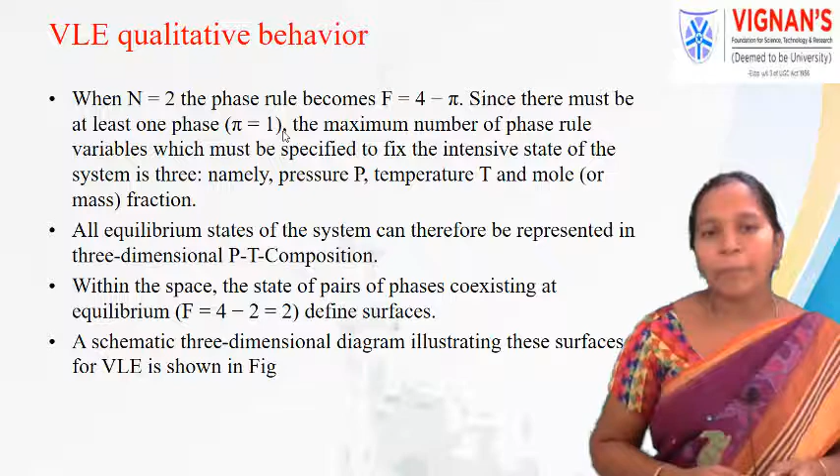A three-dimensional diagram is shown here for VLE, that is pressure, temperature and composition. A three-dimensional figure representing VLE, that is pressure, composition and temperature, is shown here.

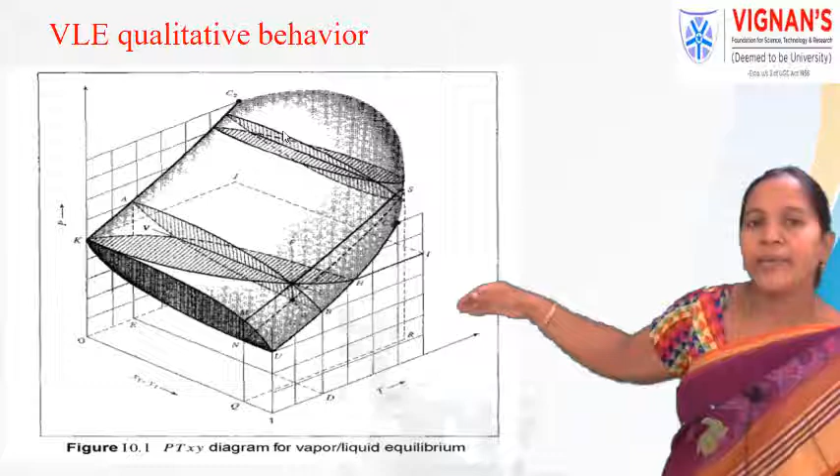Now coming to the description of general vapor-liquid equilibrium behavior. The figure represents the pressure, temperature and composition surfaces which contain equilibrium states of saturated vapor and saturated liquid for a binary system. The lower surface contains saturated vapor, that is the pressure, temperature and Y1 surface.

The upper surface indicates saturated liquid, represented with pressure, temperature and X1. Here X1 is the liquid phase mole fraction, Y1 is the vapor phase mole fraction. These surfaces intersect along the lines UBHC1 and KAC2, which represent the vapor pressure versus temperature curves for the pure species 1 and 2.

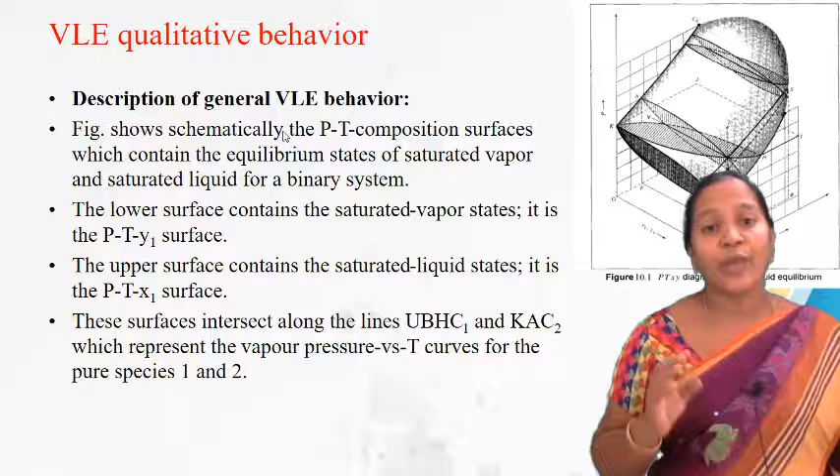Here we have to consider a binary system, that's why we have species 1 and 2. However, the lower and upper surfaces form continuous rounded surfaces across the top of the diagram between C1 and C2. C1 and C2 are the critical points of pure species 1 and 2.

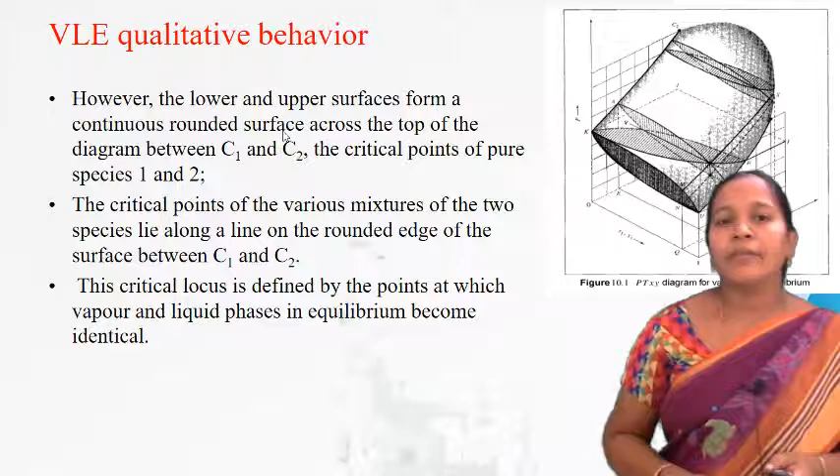The critical points of various mixtures of the two species lie along the rounded edge of the surface between C1 and C2. This critical locus is defined by points at which the vapor and liquid phases coexisting in equilibrium become identical between the critical points.

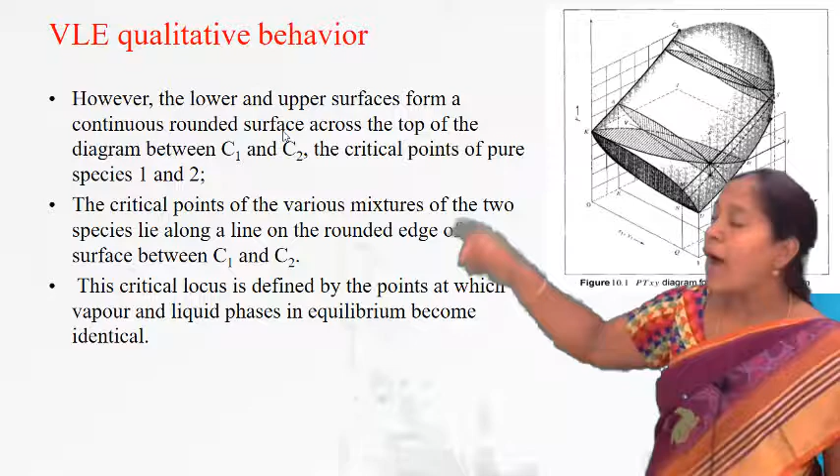The subcooled liquid region lies above the upper surface, as shown in the figure, while the superheated vapor region lies below the lower surface. The interior space between the two surfaces is the region of coexisting liquid and vapor phases.

If one starts with point F, shown here, and reduces the pressure at constant temperature and composition along the vertical line FG, the first bubble of vapor appears at point L, which lies on the upper surface. Point L is the bubble point.

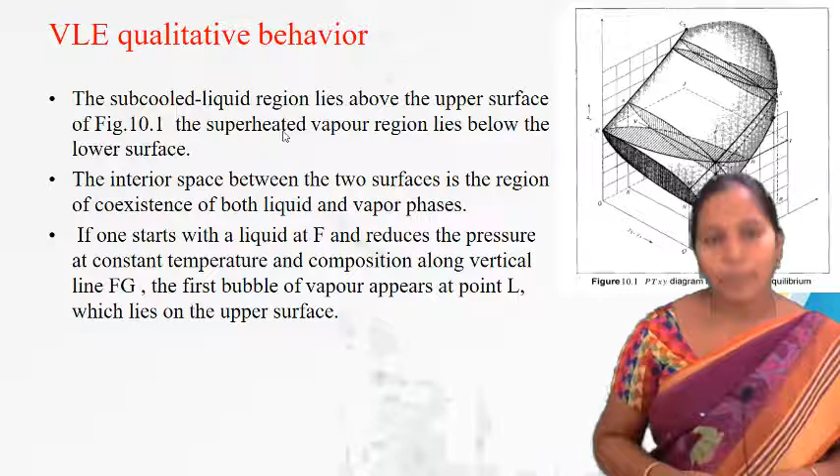The bubble point is defined as the point where the first bubble forms from the liquid. Thus the upper surface is the bubble point surface; L is called the bubble point, and the surface containing it is called the bubble point surface.

The state of the vapor bubble in equilibrium with the liquid at L must be represented by a point on the lower surface at the temperature and pressure of L. This point is indicated by V. Line VL is the tie line, which connects the points representing phases in equilibrium.

A tie line is the line connecting the two phases in equilibrium; here line VL is the tie line.

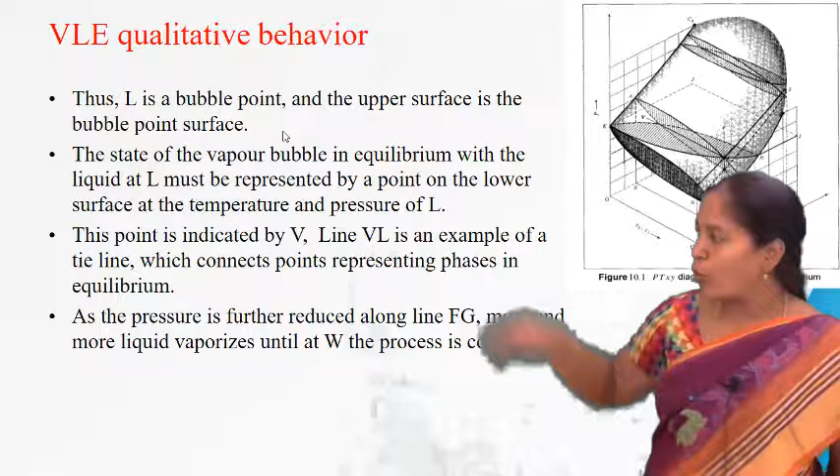As the pressure is further reduced along FG, more and more liquid vaporizes until point W, where the process is complete. Thus W lies on the lower surface and represents a state of saturated vapor having the mixture composition. Since W is the point where this occurs, it is called the dew point.

The dew point is defined as the point at which the last drop of liquid disappears. Since W is the point at which the last drop of liquid disappears, it is the dew point, and the lower surface is the dew point surface.

Further continuous reduction in pressure leads to superheated vapor.

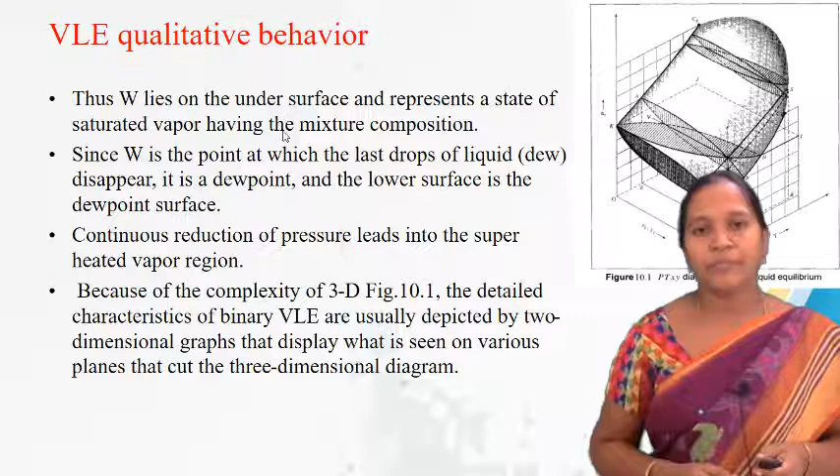Because of the complexity of 3D diagrams, the detailed characteristics of binary vapor-liquid equilibria are depicted in two-dimensional graphs, which are cut into two parts of the three-dimensional diagram. That is Pxy and Txy.

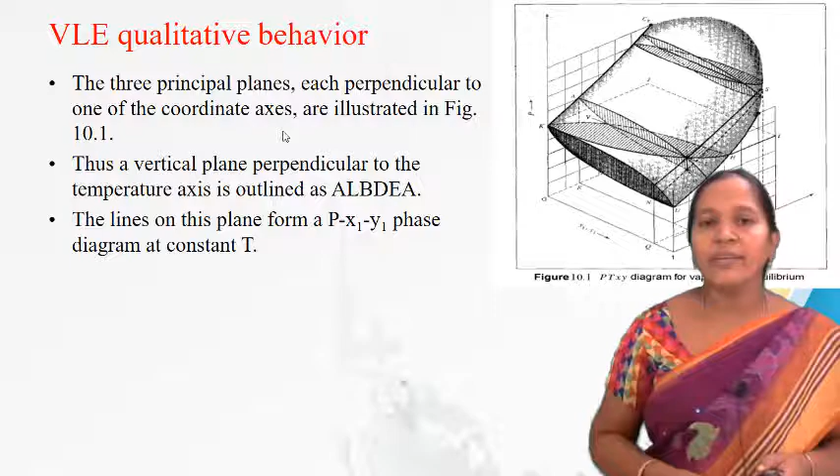If the lines from several such planes are projected onto a single parallel plane, a diagram is shown in A, which is the Px1,y1 plane at three different temperatures. The temperature TA represents, in the first three-dimensional figure, the indicated area ALBDEA.

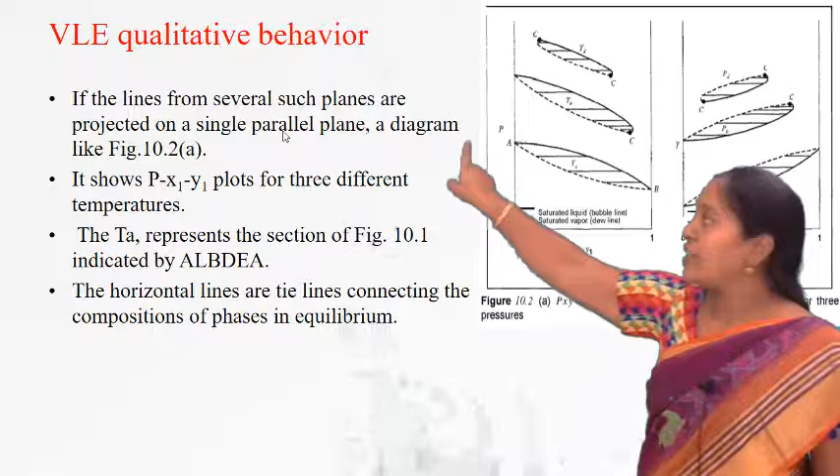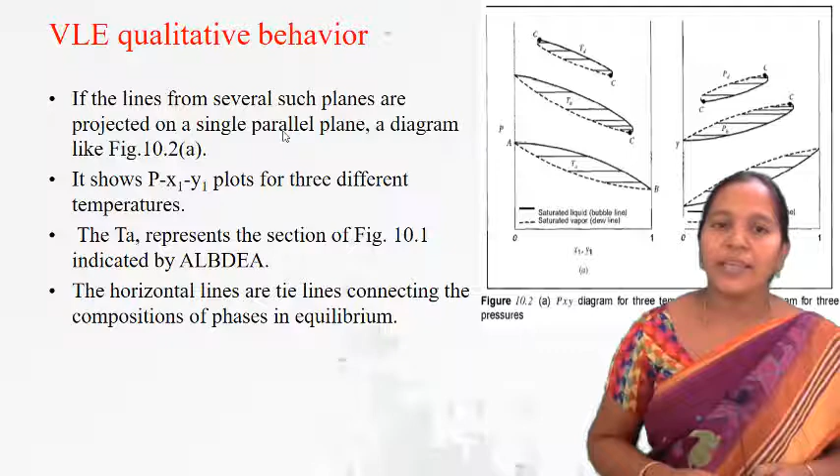The horizontal lines are tie lines, shown in figure A, connecting the compositions of phases in equilibrium. The temperature Tb lies between the two species' critical temperatures, identified by C1 and C2.

The temperature Tb lies between the critical temperatures C1 and C2, shown in the three-dimensional diagram, and the temperature Td is above both critical temperatures, that is above C1 and C2. The curves for these two temperatures therefore do not extend all the way across the diagram.

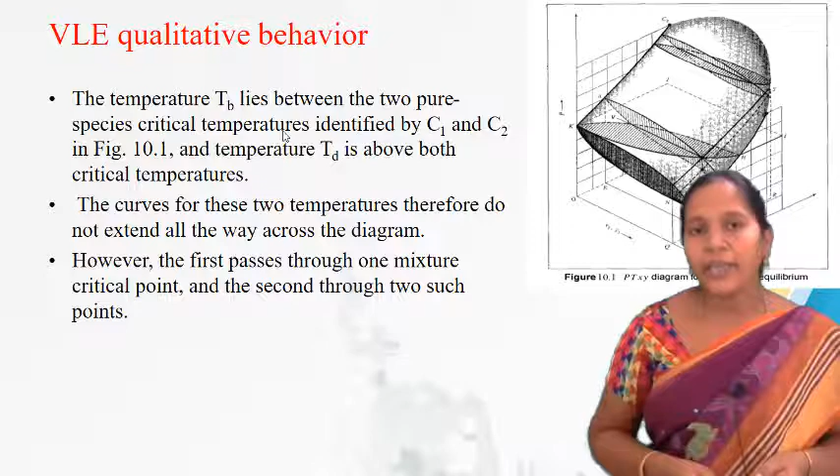However, the first passes through one mixture critical point and the second through two such points. The temperature Tb indicates the area between the critical temperatures C1 and C2. Td is above the critical temperature in the 3D diagram. All three of the critical points are denoted by the letter C.

Each critical point is the tangent at which the horizontal line touches the curve. This is so because all tie lines connecting the phases in equilibrium are horizontal tie lines. The tie line connecting identical phases must therefore be the last line to cut the diagram.

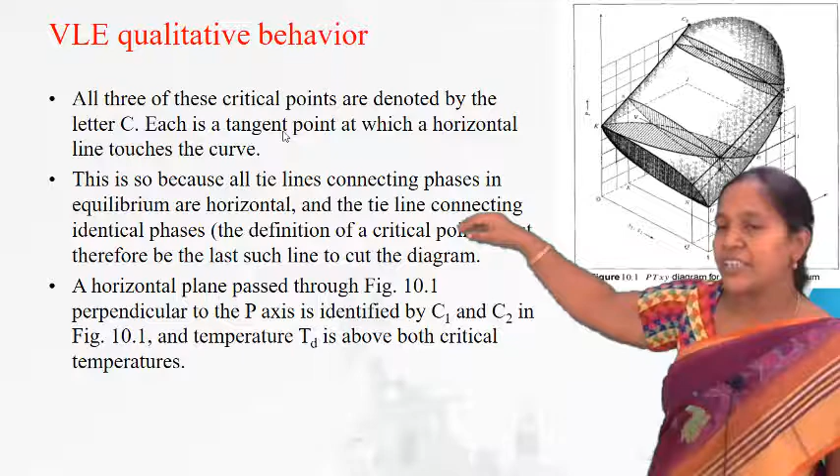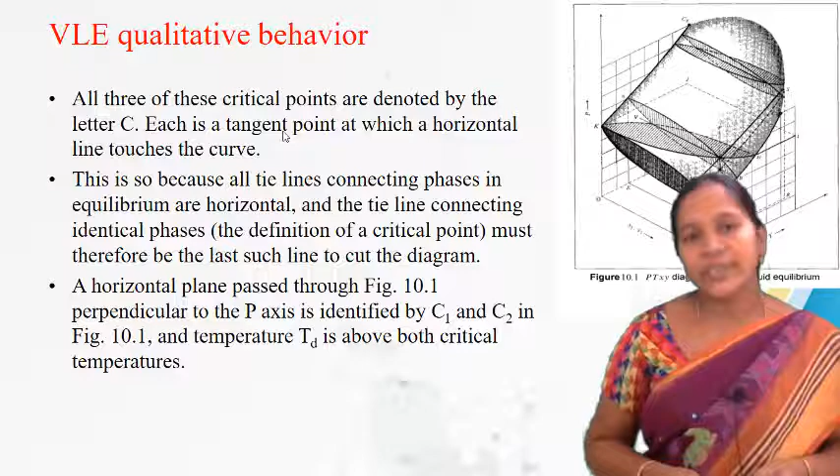A horizontal plane passes through the three-dimensional diagram perpendicular to the p-axis, identified by critical temperatures C1 and C2 in the 3D diagram. The temperature TD is above the critical temperatures, that is above C1 and C2. The horizontal plane passed through the three-dimensional diagram perpendicular to the p-axis is identified by the area HIJKLH.

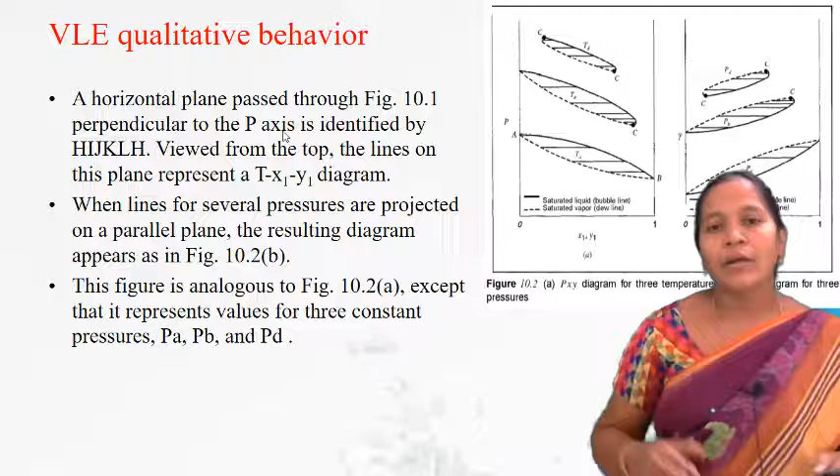Viewed from the top, that is the Tx1,y1 diagram, shown in figure B. When lines for several pressures are projected on parallel planes, at three different pressures PA, PB, PD, the resulting diagram is drawn in figure B. This figure is analogous to figure A, except the values of temperature are replaced with pressures.

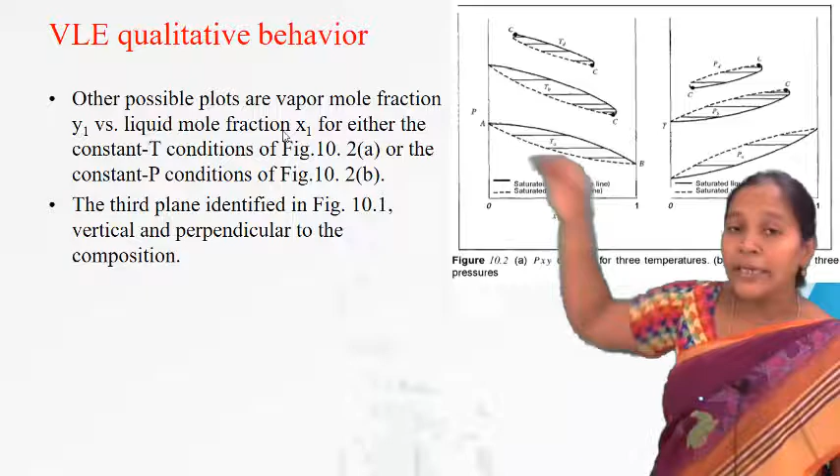Other possible plots are mole fraction Y1 versus liquid mole fraction X1, either at constant temperature or constant pressure. The third plane identified in the 3D figure is vertical and perpendicular to the composition.

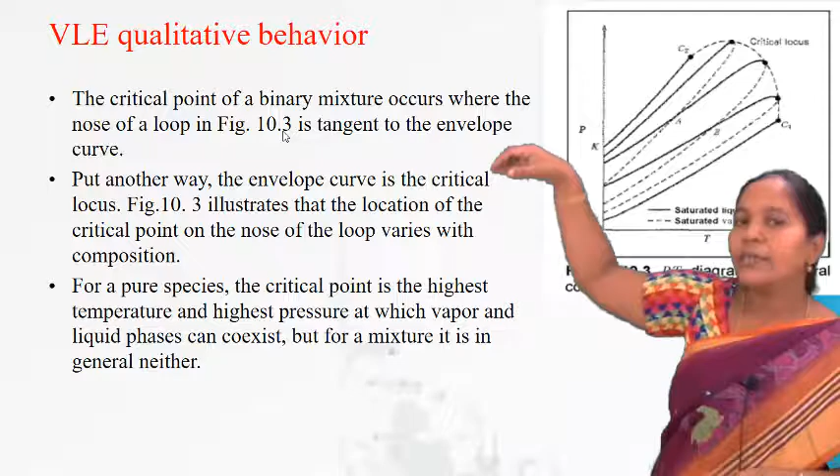The critical point of a binary mixture occurs where the nose of the loop, this one in this figure, is tangent to the envelope. Put another way, the envelope curve is the critical locus. This third figure indicates that the location of the critical point on the nose of the loop varies with composition.

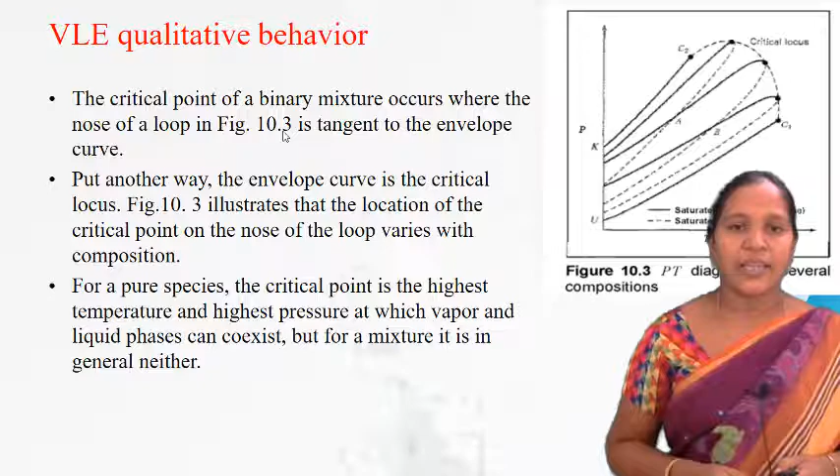For a pure species, the critical point is the highest temperature and highest pressure at which vapor and liquid phases coexist in equilibrium. But in the case of a mixture, this is not the case. Therefore, with further decrease in pressure, a condensation process occurs under certain conditions. Consider the enlarged nose section of the single pressure-temperature loop, shown in figure 4.

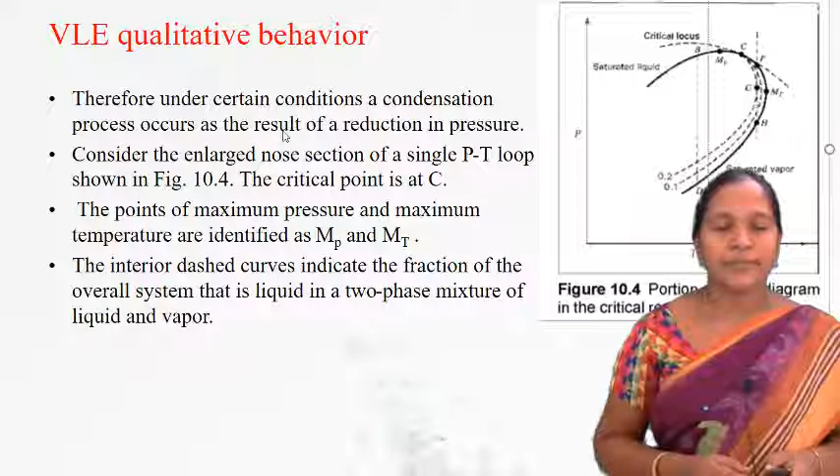The critical point is C, which is here. The points of maximum pressure and maximum temperature are identified by MP and MT. The interior dashed curves indicate the fraction of the overall system that is liquid in a two-phase mixture of liquid and vapor. To the left of the critical point, a reduction in pressure along line BD is accompanied by vaporization of liquid from bubble point to dew point.

However, if the original condition corresponds to point F, a state of saturated vapor liquefaction occurs. Further reducing the pressure reaches point G, after which vaporization takes place until the point reaches the dew point, H. This phenomenon is called retrograde condensation.

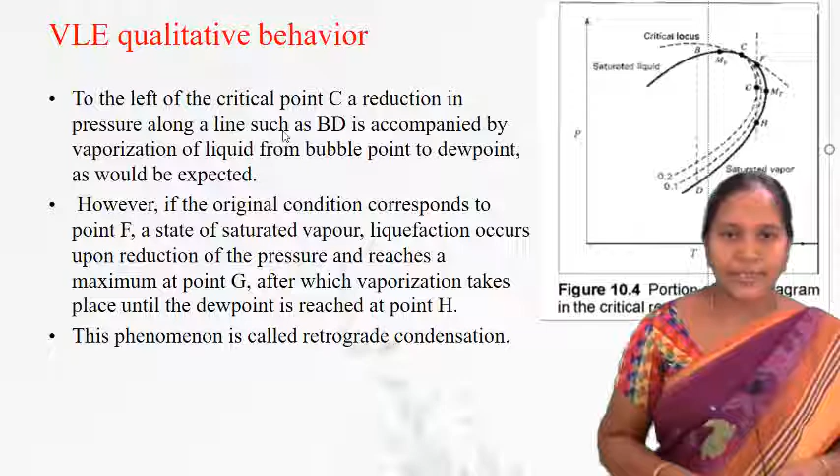It can be important in the operation of deep natural gas wells, where the pressure and temperature in the underground formation are at conditions represented by point F. Generally, in the operation of deep natural gas wells, pressure and temperature in the underground formation are at conditions represented by point F. If the pressure at the wellhead is that indicated by point G...

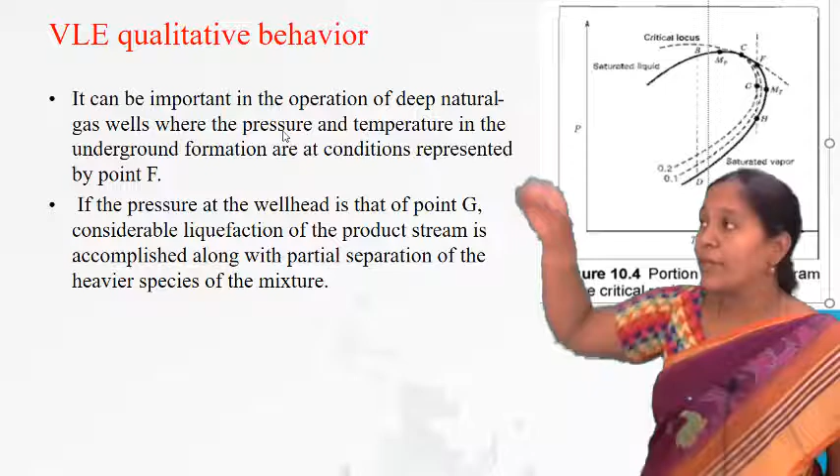...liquefaction of the product stream is accomplished along with partial separation of the mixture's heavier species. Within the underground formation itself, the pressure tends to drop as the gas supply is depleted. If not prevented, this leads to the formation of a liquid phase and a consequent reduction in the production of the well.

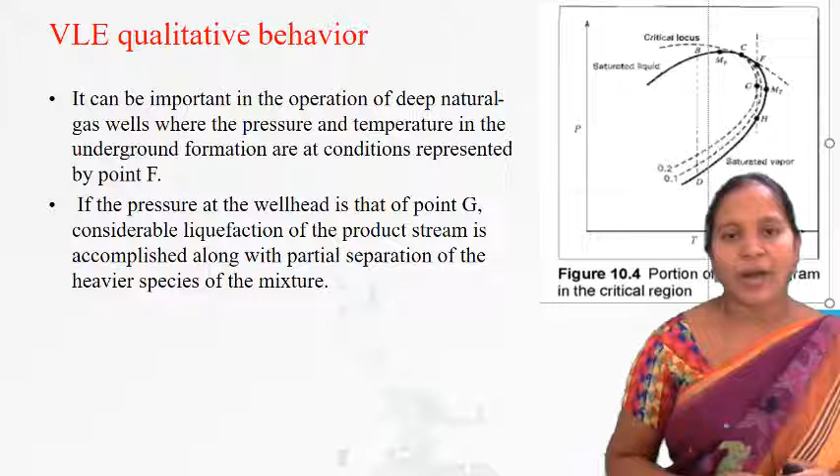Repressuring is therefore a common practice: lean gas, meaning gas from which the heavier species have been removed, is returned to the underground reservoirs to maintain elevated pressure.